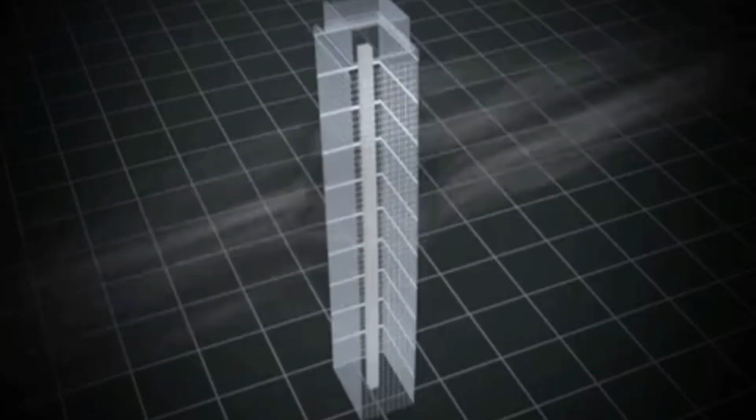We know wind force increases as the height of a building increases. And if the building height is like that of Burj Khalifa, then the allowable deflection is 3 meters or so, which can make the people inside the building uncomfortable.

So, engineers regularly change the profile of tall buildings so that the boundary layer of wind that is formed around the building will get confused with height because of the change in the shape of the structure. This reduces wind force drastically and helps the tower to remain upright. The lateral forces are simply carried by the tower frame and shear wall system.

We all know how devastating earthquake can be. But don't worry, taller buildings perform better and show much more anticipated deformations during earthquake than shorter buildings. But wait, is that really true? The probability of failure of a structure depends on the way it was engineered. It is not as easy as it sounds or feels.

Designing a structure to resist earthquakes lies under a lot of assumptions. Straight from the analysis approach, assumptions in code and probability of earthquake, a building might collapse if it has one of the following. Ground motion or ground acceleration or intensity of earthquake is higher than what is calculated.

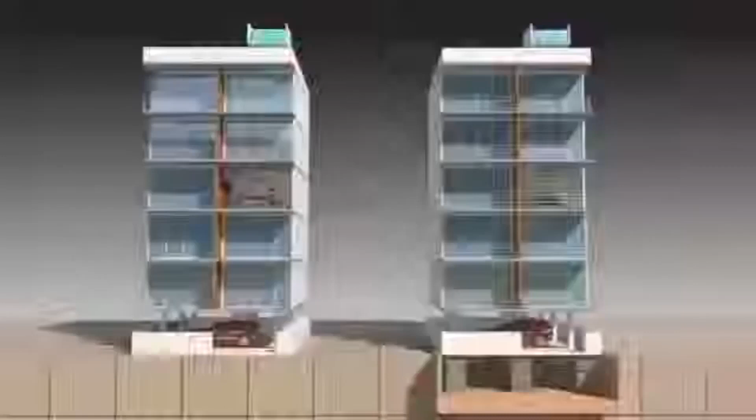Low ductility in the building. If the building is designed without any ductile detailing of reinforcement and not even single monitoring during construction, then that building, regardless of it being a tall or low-rise building, has more chances of collapsing than any other structure.

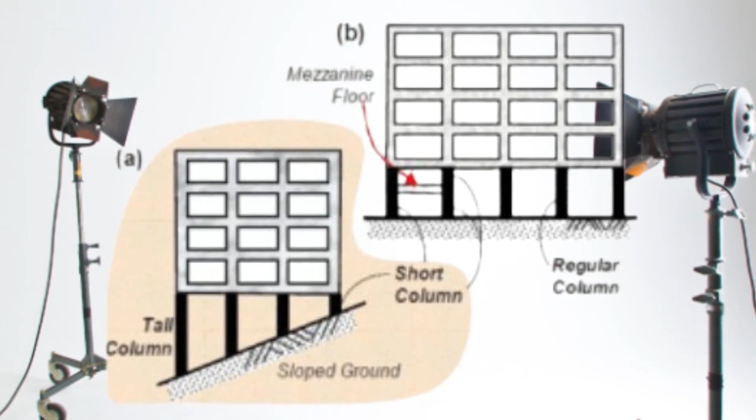Then irregularities in building. If the building has a couple of very short columns, then during earthquake they will end up taking more load and collapse because of this high shear demand. And if there is a presence of weak story that has stiffness less than compared to adjacent stories, they will drift way more than other stories, and this will have a higher chance of collapsing.

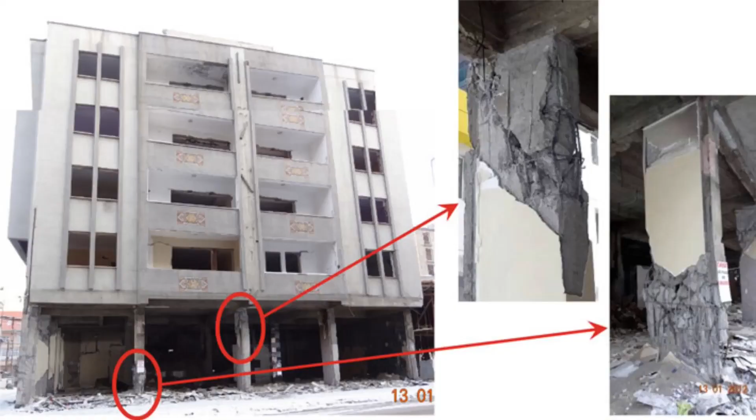If the structure is very irregular, then the load path will become complicated and that may lead to structural failure. So designing this building to withstand strong earthquake ground shaking motion will also be a real challenge for the engineers.

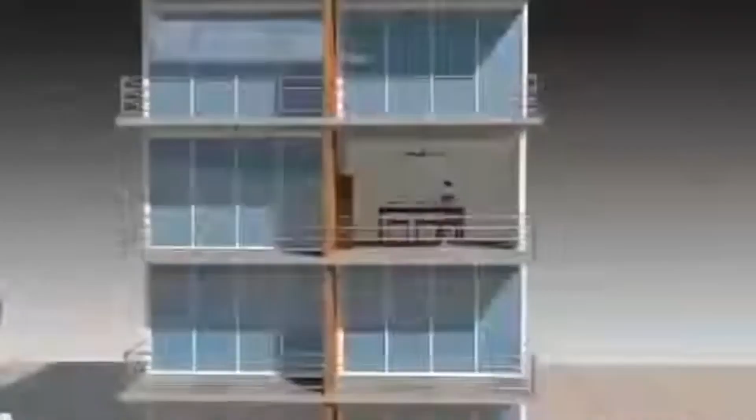If you have to build a structure 3,000 meters high, then you will need a strong foundation. This foundation will be a combination of raft and piles. The foundation will be several feet thick and the piles will be drilled at least 150 to 175 meters deep into the soil. This will make the total depth of foundation equivalent to 175 to 200 meters deep from the lowest floor. I am saying the lowest floor because the building is so huge. It will require several stories of parking.

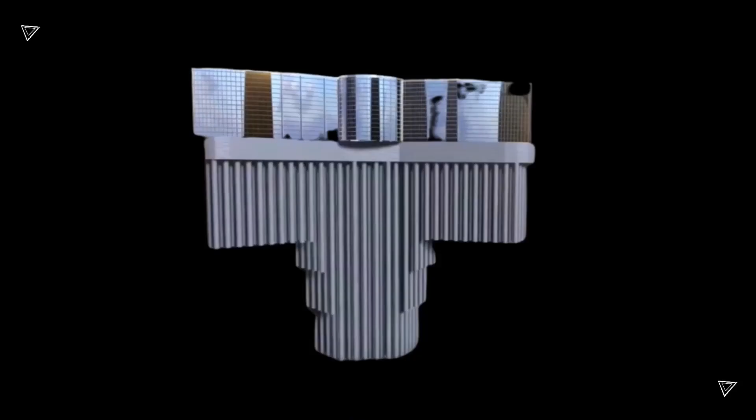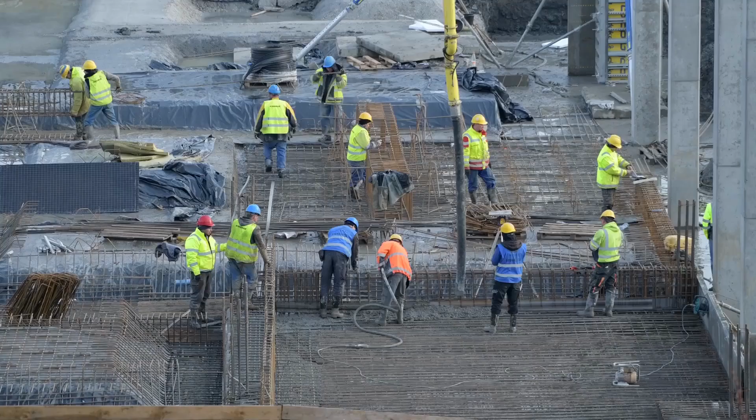The foundation of Burj Khalifa, which is 828 meters, has piles driven about 50 meters into the ground and has a raft which is 3.7 meters thick. Now, you can imagine why we require such a giant foundation. The foundation of Burj Khalifa looks something like this. As you can see, the plate you are looking at is a mat, while the tubes are piles which are driven into the ground. So the foundation of this structure will be so massive that it will use more concrete and steel than the largest modern structure ever built. This could be economically suicidal.

It takes around 10 minutes to reach the top of Burj Khalifa, that is the highest occupied floor, located at 585 meters from the ground. Because this height of 585 meters is so high, you can't just use one elevator to move from ground to the top floor. You have to switch elevators in order to get to the highest floor. So imagine the same thing for a 3-kilometer tall building. We will require many more elevators with transfer levels.

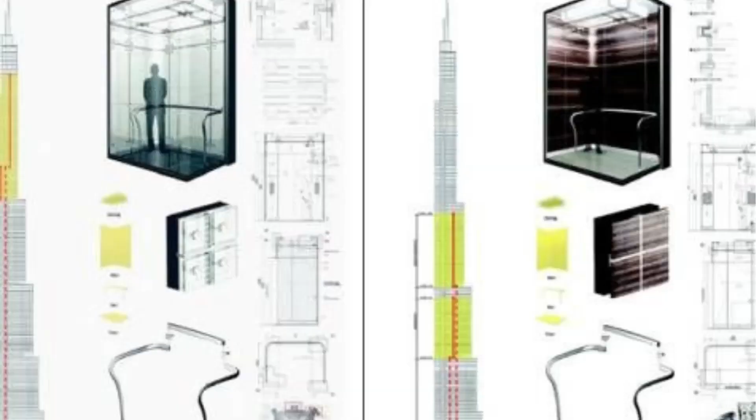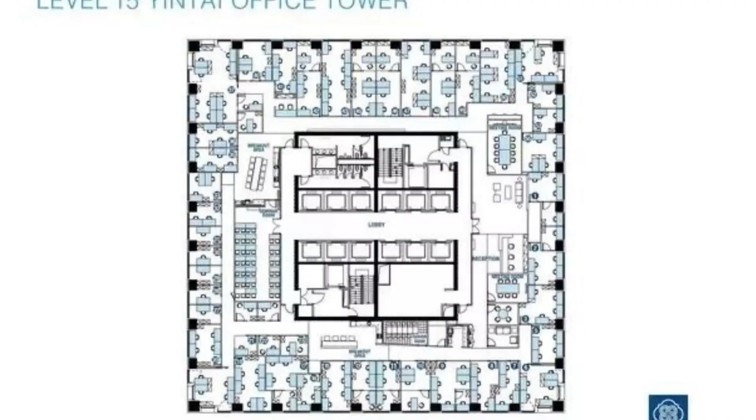In a building like the Burj Khalifa, there are 57 elevators. So in such a building, we will require anywhere around 150 to 175 elevators, assuming that the elevators are much faster than elevators used today. You also need to provide as many stairs as possible. Therefore, in order to provide this many elevators and stairs, we will require a huge central space around which we can construct a core wall or a lateral force resisting system. These massive walls can resist the lateral forces, but to provide this many elevators will really be a challenge for engineers.

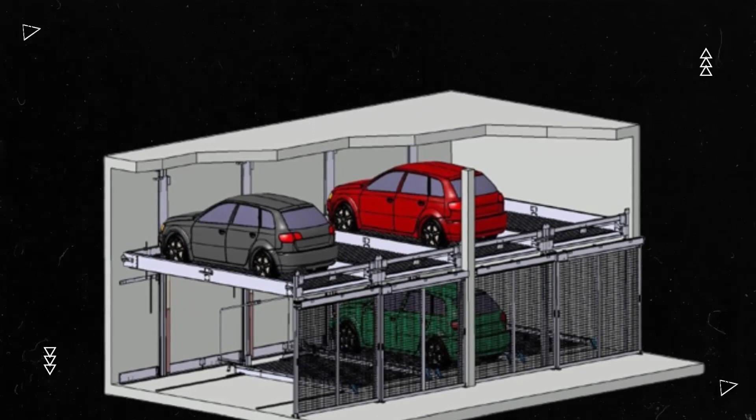If such a tall structure will be constructed, then it will obviously be a mixed-use building, which leads to the question of how will they deal with the issue of parking. Several floors for parking will be needed for the residents. And in order to make everything quick so that people don't have to drive 15 or 20 or 30 stories into the ground or above the ground, we will have to work with automatic parking systems where you stop your car at a designated location, then there will be an automated machine that will take your car to an empty spot. This automated machine will do the parking and park your car in any available space. Then you will be able to track the parking spot. This is the only way to make the system efficient, and some buildings have already adopted this parking system.

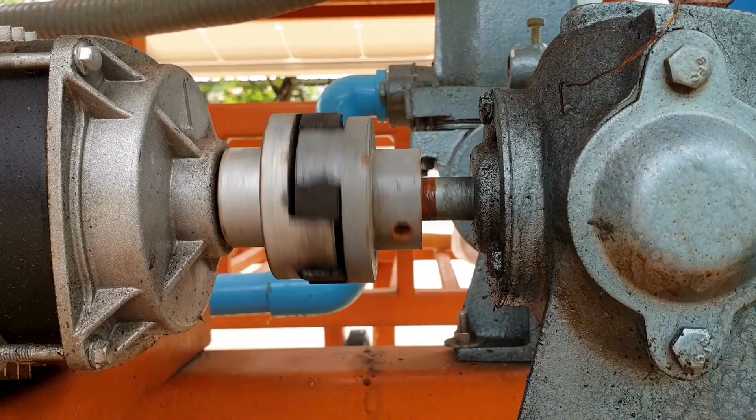How will residents living inside this building deal with a fire outbreak? In case of a catastrophic fire, we will have to think of something innovative where people don't have to come all the way down to the ground. This is where we will have to adopt the concept of refuge rooms. These refuge rooms have been adopted in tall buildings where there are big fireproof rooms constructed at every few floor levels where people can lock themselves in and wait for firemen who can rescue them. Apart from this, we will require strong pumps to pump water to the top of the building. With this idea in mind, we can say building this high can be achieved, although it will be really challenging.

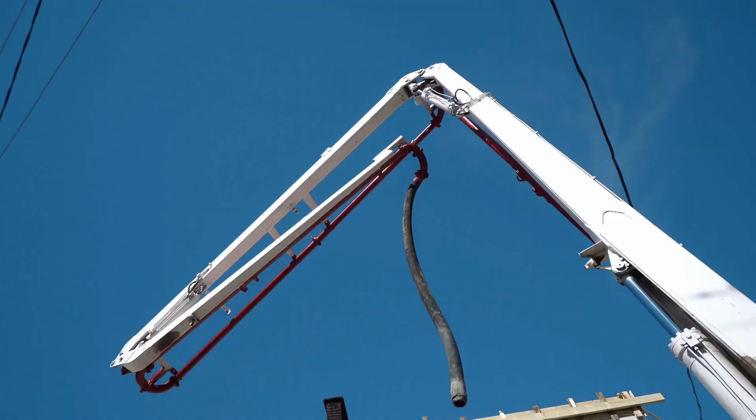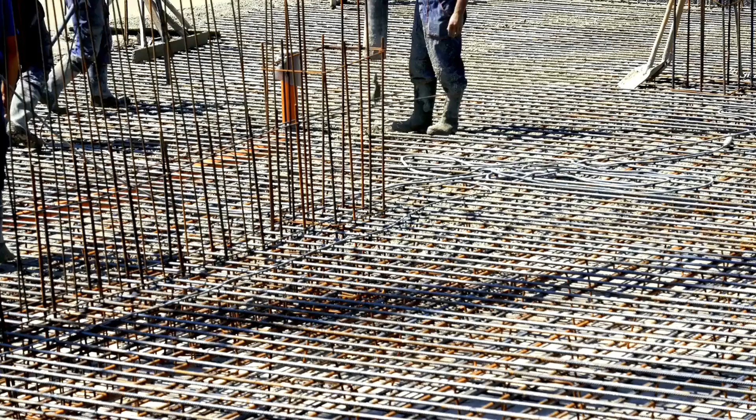If you want to construct a 3-kilometer tall building above the ground, you will have to pump concrete up to that level. Now, we have pumped concrete in Burj Khalifa, and guess what? It is not up to 828 meters, rather it is up to 600 meters. Now, imagine trying to pump concrete to a height of 3,000 meters. It will really be difficult and challenging. We will face a tremendous amount of challenge to pump it up to 3,000 meters without letting the concrete dry, even if we add admixture to the concrete.

So this will be something we will need to consider before deciding to build a structure as high as 3,000 meters. Although there are other factors which we will need to take into consideration, these are the main factors. So it is not as easy as it sounds to build this high. But as the saying goes, imagination is a beautiful thing. It can take us anywhere, but it is reality that limits us.